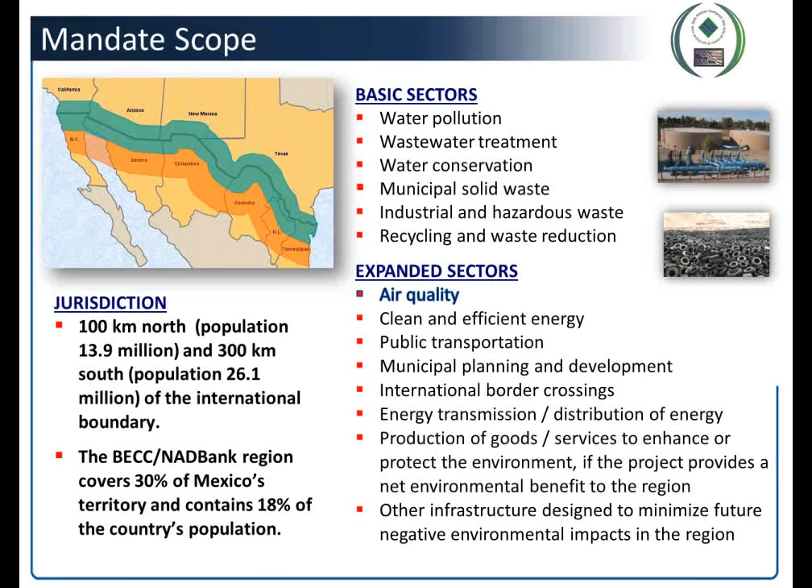So at this point, I'm going to pass the speaking to J.T. O'Brien. J.T. O'Brien is one of our project managers here at the BECC who has extensive experience in working with rural communities, and in fact, many of the projects he's working on are with rural communities. He was able to identify this need based on communications he had received not only from the communities but also from congressional offices. So J.T., if you would like to take the lead from here, I would greatly appreciate it.

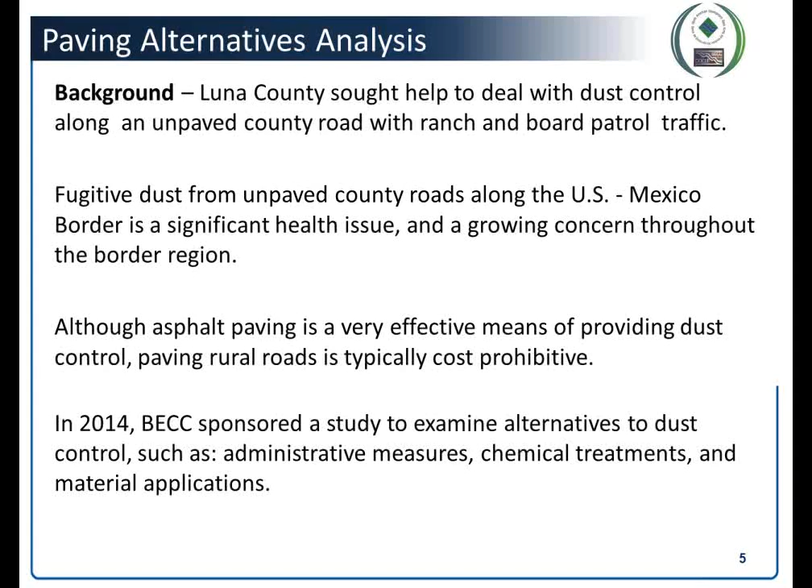But one of our biggest issues was that even though asphalt paving is a very effective means of dust control, it's just too expensive. For example, in Luna County, the road we're looking at is 20 miles long, and it's not a heavily used road. It's primarily a ranch road with a lot of Border Patrol traffic. So we knew that we needed to come up with alternatives that would be more cost-effective. So those were the primary motivations for this. Could you go to the next one?

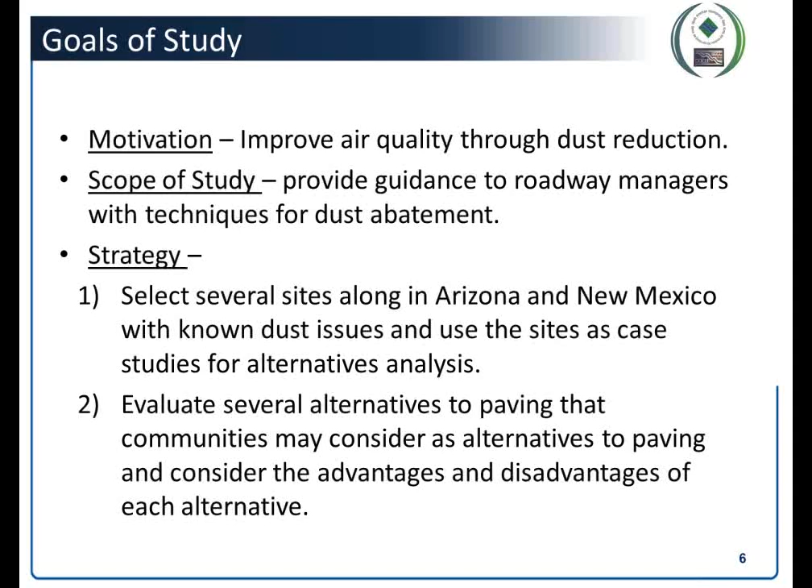Of course, the motivation then was to improve air quality. That fits within one of our sectors. And the scope then was to provide guidance for roadway managers in the border counties for looking at different techniques and strategies for dust abatement. As part of that strategy, our scope looked at several sites in the region. The sites were selected because they had different types of issues. For example, cattle on the rural roads, heavy equipment on a military base, residential type traffic. They were selected to provide a variety of situations that roadway managers might encounter.

After we scoped it, Kimley Horn was selected as the consulting engineer to perform the analysis, and then they helped further hash out some of our scope. Kimley Horn is a national organization with 70 offices. They provide a lot of services in a variety of disciplines. Today's speakers are Scott Altair and Alan Hathcock.

Scott Altair was very instrumental in helping us select sites because he's worked on the border for the past 17 years, so he knows the border region really well and has a lot of experience in particularly this issue of dirt roads and dust control. And then Alan Hathcock was the project manager, and he has a lot of expertise in roadways as well, and really did the nuts and bolts work on this study. So at this point, I guess I can pass the speaking over to them.

Thank you, JT. While we get our presentation up, are you seeing the introduction screen? Yes, we are. Okay, great. We can see your presentation now. Okay. Okay. So thank you, JT.

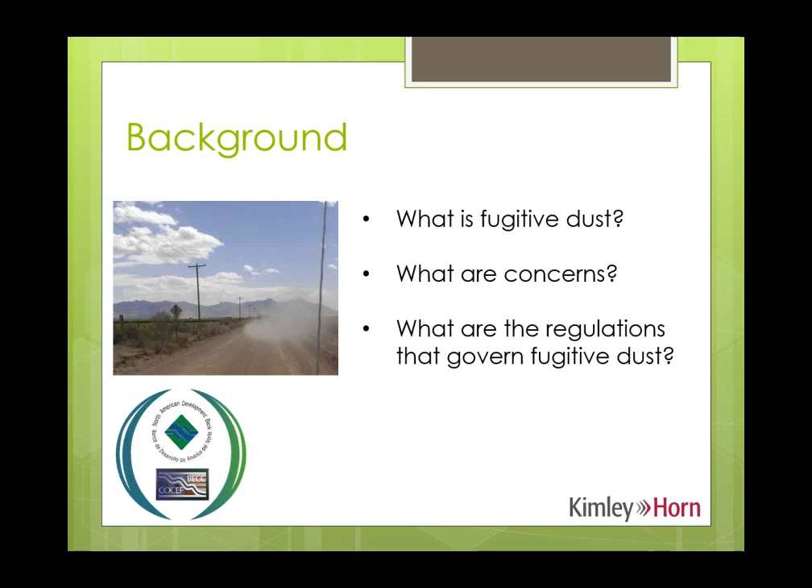Then we moved into the research and assessment component. The research and assessment was where we identified available abatement methods, documented the benefits, limitations, cost, and lifespan of the options to treat dust. And then finally, we moved into the results stage where we determined the cost to apply a particular dust abatement method, how many applications are required, is it effective, and if it is effective, how cost effective is it? And then we concluded it with a recommendation for each of the sites. So that's a little bit about what the study is going to show you and document.

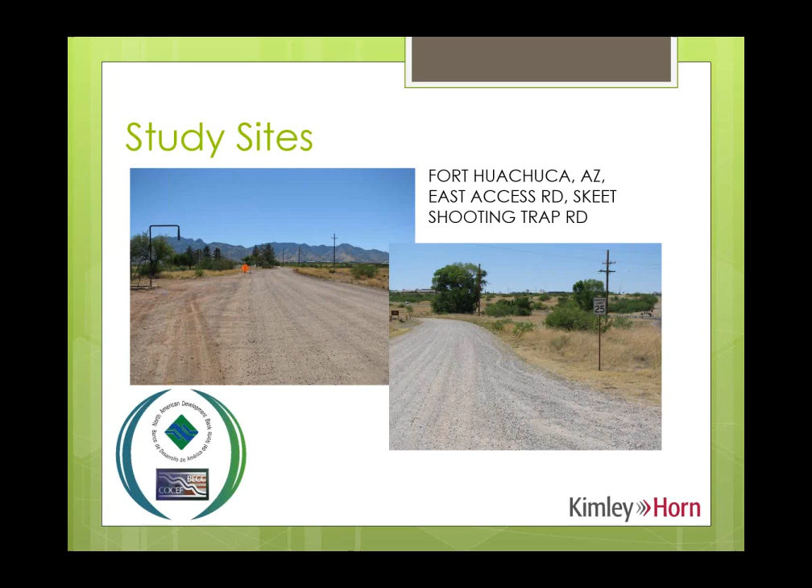The fourth study site is on Fort Huachuca, Arizona. There were several roads that combined to make up a 2-mile study segment. Unique characteristics here is this is a restricted installation. There's no public traffic. It's mainly construction traffic. While it's low traffic, it's usually heavy equipment. And they have an established watering policy in effect for all contracting work. So this particular site is unique also in that they don't have their own road maintenance. It's all contractor-owned, contractor-operated, and again, they do have an established construction watering program in effect.

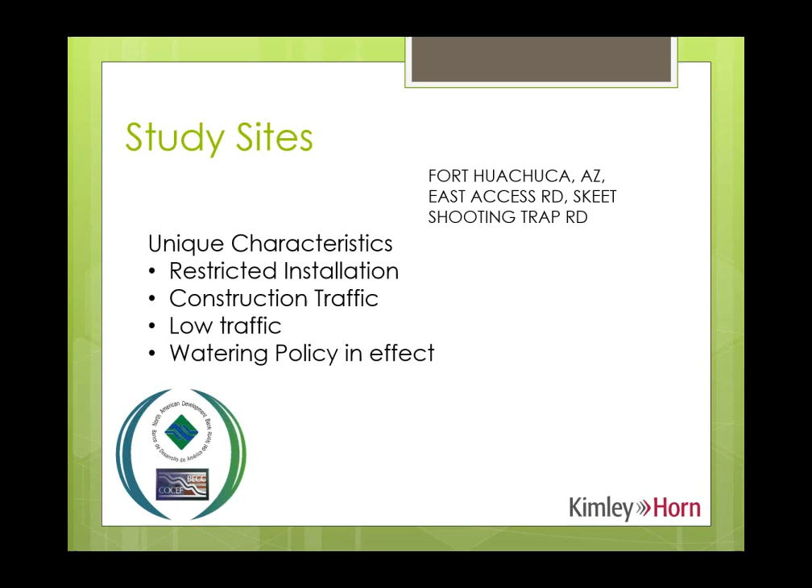And it is the closest site to a major urban area, which is something that we take into account when we get into the costing and analysis phase, because obviously being closer to an urban area, the cost of things are probably going to be more cost effective. Also, any kind of maintenance done on this particular site is contractor-owned, contractor-operated. They do not have their own staff.

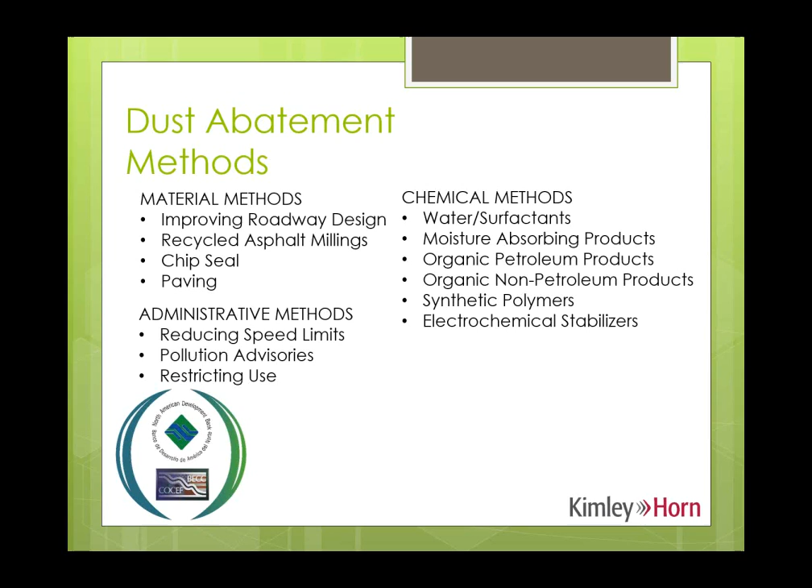Now, we're not listing any proprietary products. There are a lot of proprietary products out there, so these are all non-proprietary names. When you go and look for these products on the market, they all have very clever names that are catchy. So you won't hear us use any of those names today. So I want to go through each of the categories. This would be the material category, and just show you an example.

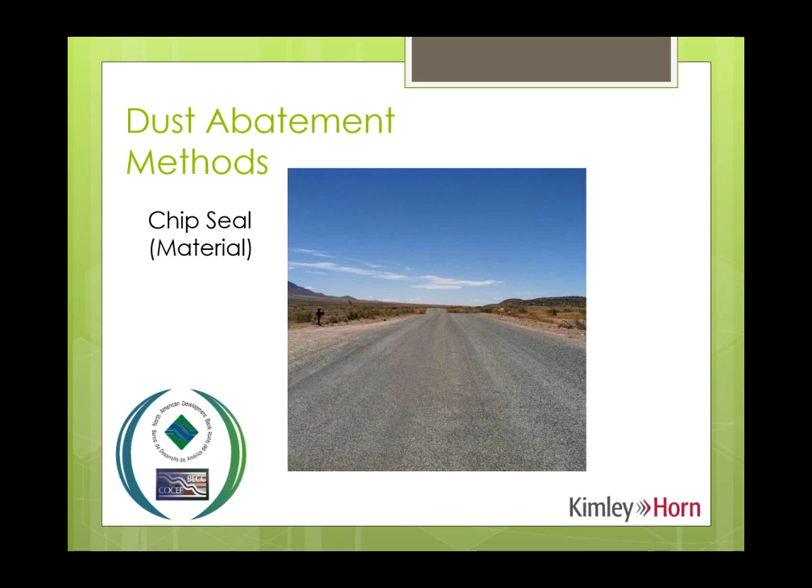Now, in the administrative category, reducing speed limits, here's an example on Fort Huachuca where they've employed a 25-mile-per-hour speed limit. Not all public agencies have the flexibility to do this, as state law generally governs the application, posting, and enforcing of speed limits. Sometimes if you can't alter the speed limit, advisory speeds or advisory placards on advanced warning signs may be allowed.

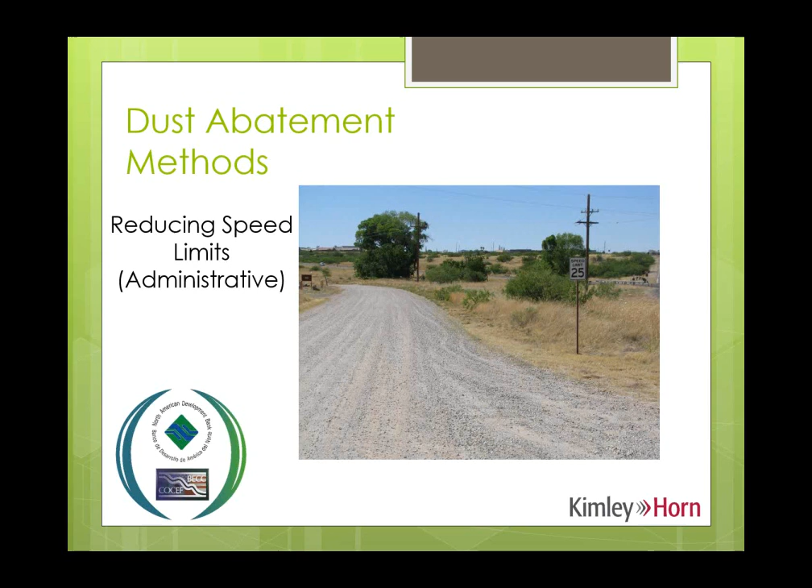In Arizona, state statutes allow the local authorities to reduce the speeds to 15 miles per hour for air quality reasons. But in the border regions, you'd have to check each of your local statutes to see if that's allowed. In the chemical category, we're showing here a synthetic polymer. This one that's being applied here is a proprietary synthetic polymer, and it's applied to a desert road. This falls into the chemical groups because it's altering the chemistry of the soil.

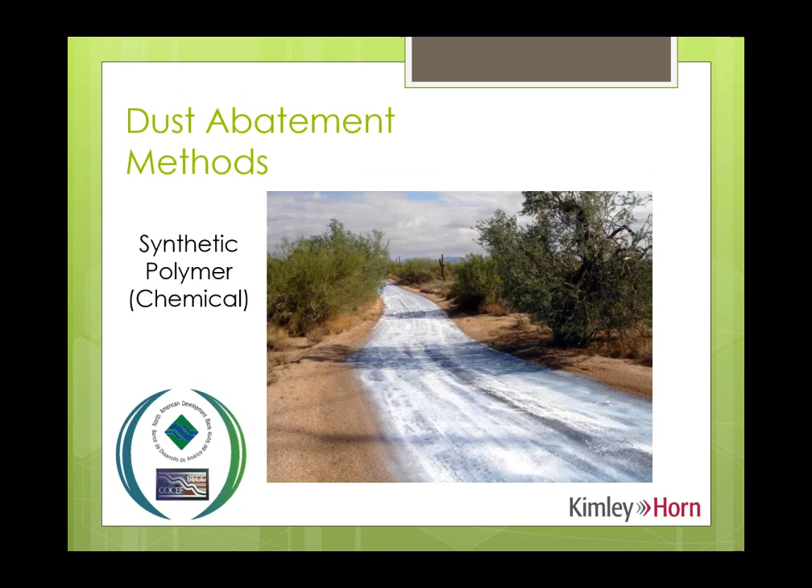So these are the three categories that we looked at. And before I hand things over to Alan, this slide you're looking at right here is from section 3.5 of the study. It's a matrix, and we list each of the dust abatement treatment options. And this is just one page of it. And what you're looking at here is synthetic polymer products and clay additives.

And we categorize these by listing the benefits, limitations, initial application cost. So we want to differentiate between the initial application cost and then the continuing maintenance cost. They're two separate items. We also list what the effective lifespan is and then how available these products are in each of the areas.

Now, just for example, clay additives. Well, any road manager may know too much clay is not a good thing for your roadway. So used in the wrong proportions, this can cause rutting and deformation of the road. Bentonite has been very successful on limestone roads, limestone treated roads. So you'd need to make sure, and that's the purpose of this matrix, is for you to go in and make sure that this is the appropriate method before you go and try it. Because if you have the wrong soil chemistry, you may not want to use this.

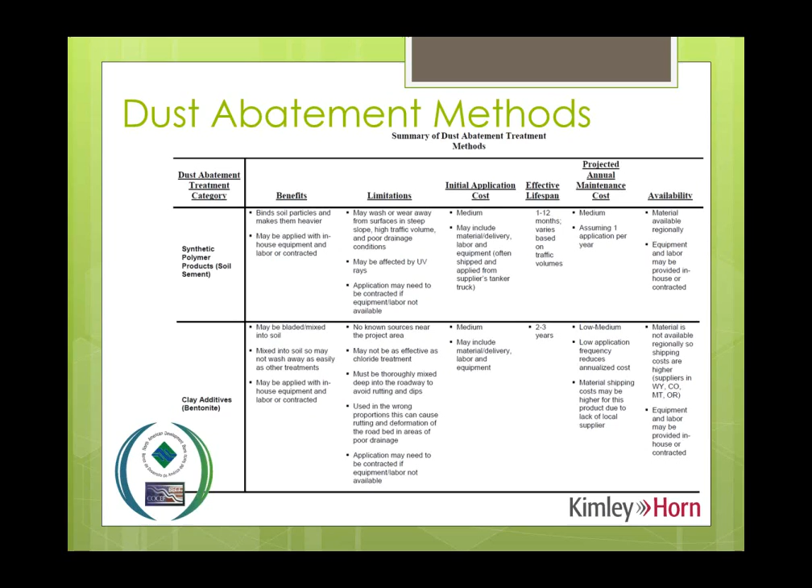So now I'm going to hand the presentation over to Alan Hathcock, and he's going to discuss the analysis and recommendations going forward. All right. Thank you, Scott. Our analysis included the costing of these items and then also projecting that over time and trying to come up with a way to see which is the most cost-effective thing to apply to reduce dust on the different roads throughout the border region.

This first slide here I wanted to share. These are the 9 different applications that we included in our cost analysis. So the first one is watering. The next 5 are within that chemical category, and the last 3 are within the material category. And all of the following charts will be in the same order, so as we look at them, you'll be able to kind of sort through that. Now, again, Scott mentioned there could be many manufacturers that do calcium chloride or the other things. We're just comparing the different costs between the different methods, not between manufacturers.

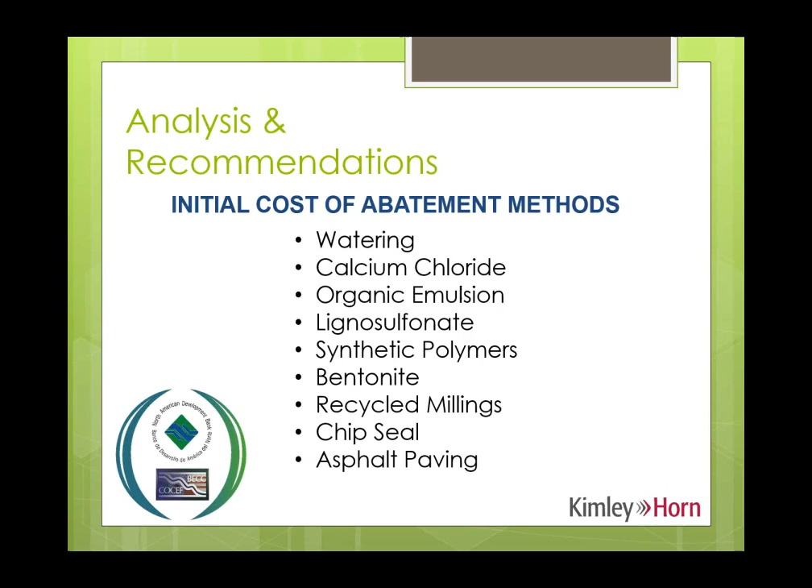On this next slide, you'll see that we have a general pricing and then the last 3 bullets. I want to specify the general pricing would be the cost to lay a product or an application along 2 miles of road, 24 feet wide. But it would be pricing that anybody would have to pay, no matter where you are along the border region.

The last 3 bullets are more like pricing factors, things that would impact that starting cost and make it either more or less. So those three factors would be proximity to the manufacturer of the product, so shipping costs. Could also be proximity to your nearest water source to be able to apply the product. Other things are if you have in-house labor and equipment versus hiring out to a contractor.

And then another factor that changes cost between the five different sites would be the traffic volume and how often you have to apply the dust abatement methods. So the higher the traffic greatly impacts how often you have to place the material or the method.

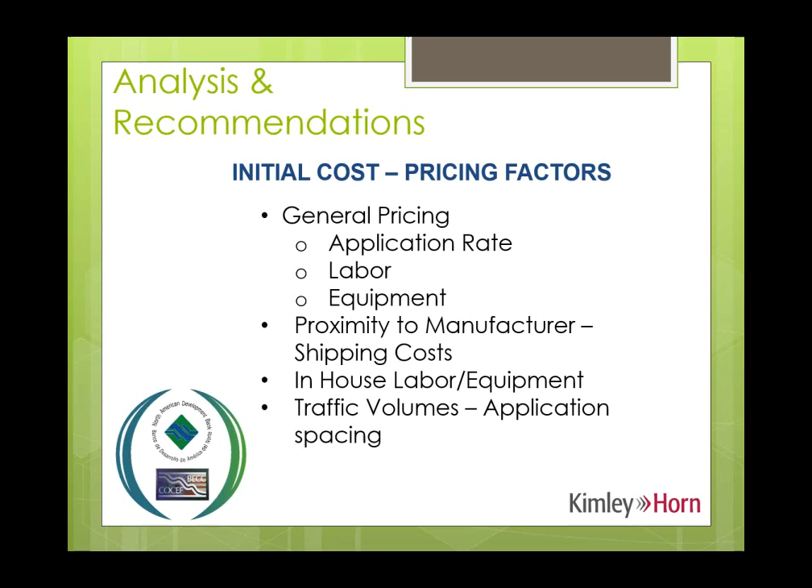So here's an initial cost example, and we wanted to include these so they're a tool for anybody to go in and go through the same process that we did. The information for all 9 types, for all 5 sites, is included in Appendix L of the study. Up in the top right corner in the box there, you'll see that we have our assumed costs for labor and for equipment.

And then over to the left top, you'll see that we're analyzing calcium chloride, and we show the rate, the length, the width, the area, the application rate of this, and come up with a cost just for the product. Then the application labor cost, we assume some time frames of how long it would take to do the work, and then equipment. So in the middle of the screen, you'll see general pricing, $23,760. So that's the base cost to lay down calcium chloride.

Then you'll see right below that, due to different traffic volumes, each location has a different lifespan. And over to the right, Scott mentioned earlier, Santa Cruz County has a higher traffic than the other 4 sites, but they all are different. They vary. So Santa Cruz County, we estimated that it would probably be 1 month before you'd have to reapply calcium chloride. And Hidalgo County is 6 months, Luna County 3, and then Fort Huachuca and U of A, because they have the least traffic, every 12 months.

That factor goes down to the bottom chart where we want to come up with an annual cost. And so that annual cost is in blue there, and it starts to show how, because of the traffic, the drainage, the uses of the road, the protection, and the climate, those all impact the actual cost of the abatement methods, and in this case, calcium chloride.

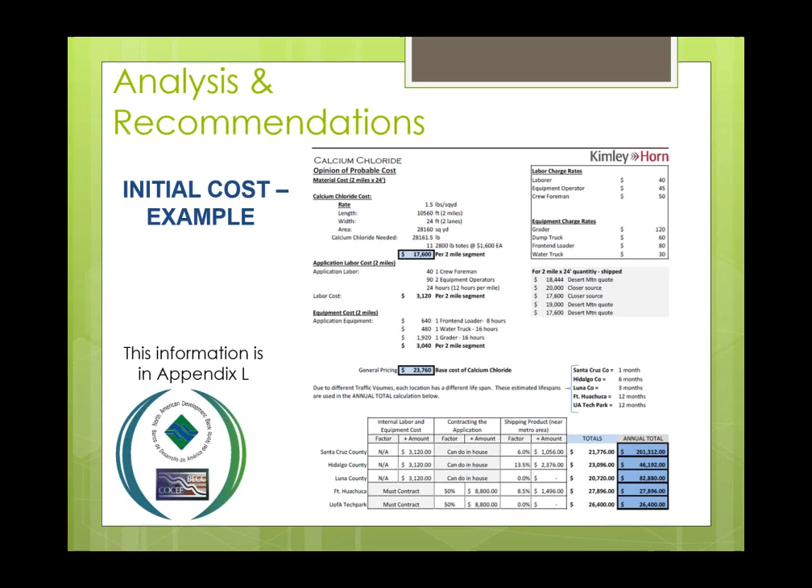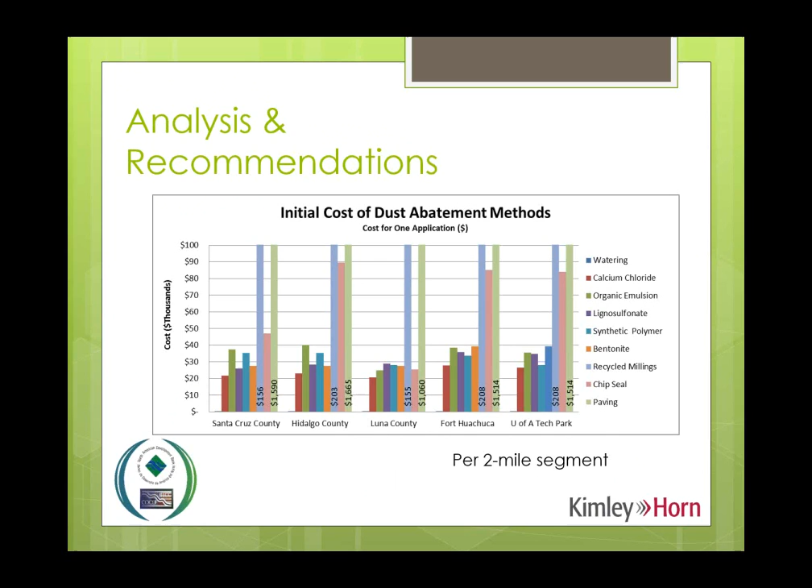So you can see that watering, you can hardly even see it. In the very beginning of each of those, it's just probably $1,000. But the initial cost isn't what's so important until we start to apply the amount of time laid down. So here's a short list of why they need to be done more often for the different types of applications. Watering every 1 to 2 days, calcium chloride, so all of the chemical treatments, there's a wide range for those depending on the use of your roadway.

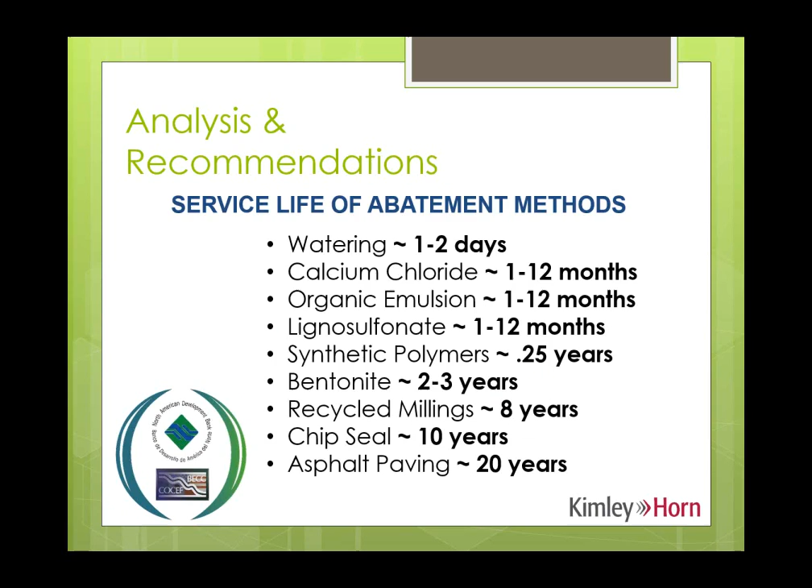And then recycled millings can last up to 8 years, chip seal can last up to 10 years, and asphalt paving up to 20 years. When we take this factor of how long things last and then the cost to place them, we come up with this next chart, the annualized cost of dust abatement methods, and it says the yearly treatment divided by the service life. So now we see paving is moving down. It's equalizing the cost of these items if it's on a yearly basis.

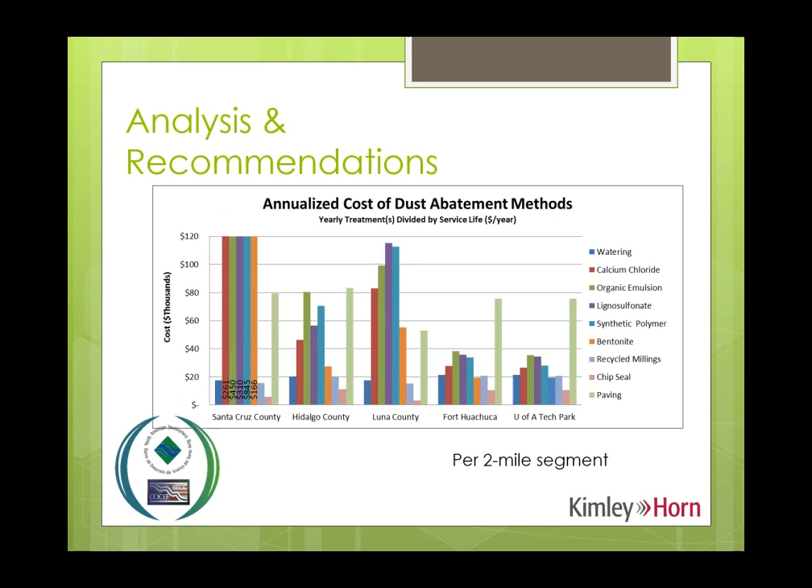But just laying the product on the ground and figuring out how long it will last still doesn't say how effective that product is. Anybody would say pavement is probably going to block more dust than a chemical treatment. And so what we had to do was analyze the effectiveness of those abatement methods. And using ADOT and FHWA methodology, we were able to use the categories that they prescribe for water trucks, chemical and polymer treatments, and hard surface treatments.

So just like the itemized cost estimate at each site, we also have an itemized PM10 calculation for each site. And so what it does is it calculates the amount of traffic, or we input the amount of traffic and then the length of the road, and then using the rates and things from their calculator, you can come up with the amount of the kilograms of dust in the air.

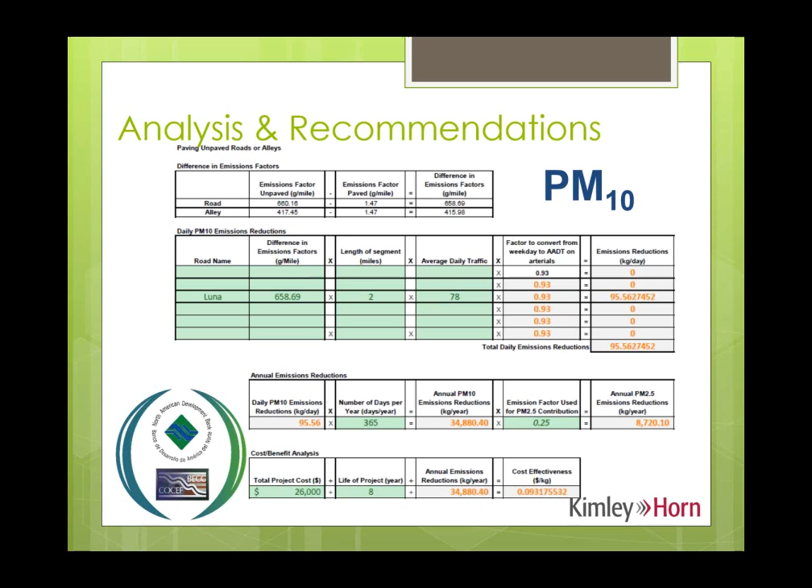So following that same methodology, here's the chart showing the PM reductions. So you see how Santa Cruz County, when they apply a pavement, they have the opportunity to reduce more particulate matter from the air. Whereas the other installations have less traffic, and so if they put pavement down, they're still only going to be able to reduce a certain amount of dust from the air.

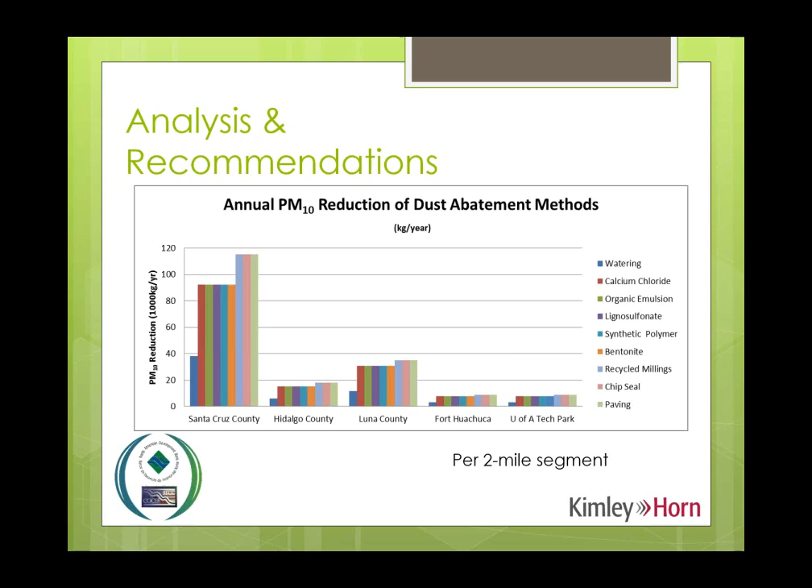And now we put all three together, which is really the point of all this. The cost effectiveness of dust abatement methods. So we're taking the annualized cost for a 2-mile segment, and we're dividing it by the amount of dust removed from the air. So it's basically dollars per kilogram. So if you spend a certain amount of dollars per kilogram, that's for your dust abatement method.

Now from this chart, we can see over to the right that chip seal and paving, like for Santa Cruz County, for instance, paving looks like a very good option. The shorter the bar, the less money you're paying per dust removed from the air. But it's also very expensive up front. The initial cost is very high.

But you can also see how the chart varies depending on those in-house operations, maintenance crews, climate, all those things have made it to where each of the 5 sites actually have a different pattern. It's not like chemical treatments are always more expensive than some other treatments. Again, the key about this chart, though, is that it's annualized cost. So, for instance, for pavement, we divided by 20-year life. And water, we multiplied by the times you'd have to do it for a full entire year.

I'd like to turn the time over to Scott, and he'll go through our final recommendations. Thanks, Alan. So what you're looking at here is our results matrix, which for each site, we wanted to make 2 recommended treatments based on the interpretation of the results. And you can see in the second column, we have recommended dust treatment number 1, and you'll see that chip seal is recommended as the preferred dust treatment for both Santa Cruz County and Luna County, and calcium chloride is the recommended treatment for the other 3.

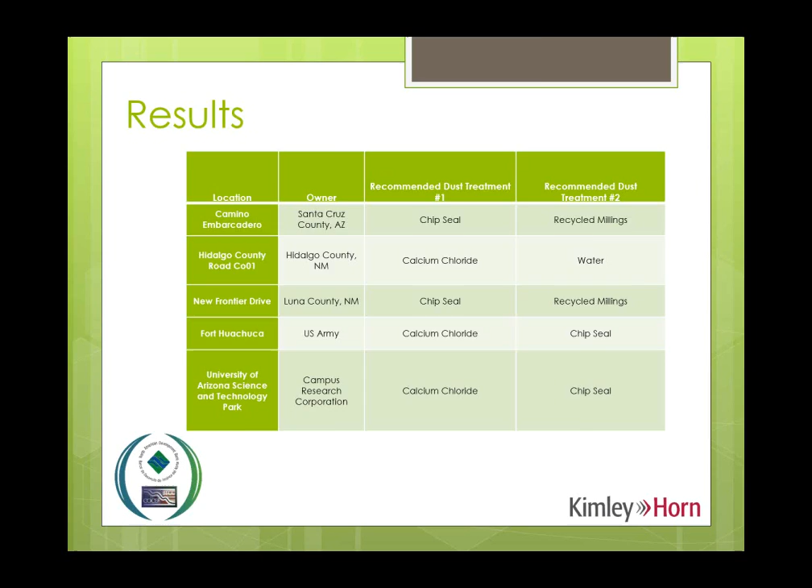Now, going back to this chart here, you may ask the question, well, why is chip seal, which appears to be the most cost-effective treatment, not recommended for all 5 sites? Well, that's a very good question, and it all relates back to the initial cost or initial investment. So what I'd like to do is take a segue here and make an analogy of the chip seal treatment or paving treatment to a purchase of a hybrid vehicle.

So if somebody was going out to buy a hybrid vehicle, we know that the gas mileage efficiency is significantly better in a hybrid vehicle, but the purchase price of a hybrid is more expensive up front. So it's going to require a higher initial investment. Not everyone probably has the budget to buy a hybrid. You probably shouldn't buy a hybrid unless you drive a lot. So if you don't drive that much, you're not going to reap the benefits of the gas efficiency. So we apply that same analogy to the selection of these products here.

Chip seal is very cost effective in what we've determined here. It basically gets the same amount of PM reduction as asphalt paving, but it's more cost effective. But it has a high initial cost. Santa Cruz County and Luna County happen to have the crews and the equipment to lay that down.

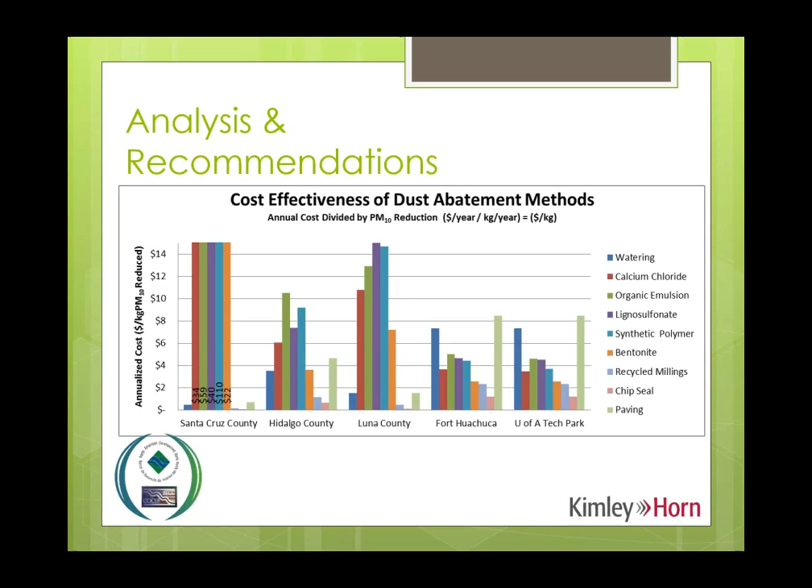So in conclusion, we've made recommendations based on trying to understand each of the site owners' capabilities and resources. We made it clear that the most cost-effective is not always the most practical and doesn't always consider the availability of startup funds.

It's hopeful that other entities can use this study as a starting point and find comparable study sites. And this study obviously may not cover every potential method, but we hope that there will be one that works for each of the road managers that are going to use this study. We hope this is used as a guideline and not a mandate for one treatment over the other.

And we also hope that we provided a supporting document that each of you road managers feels you can take to your governing bodies to help justify the right applications, and maybe even help justify a line item in next year's fiscal budget for getting some dust abatement budgeted.

So that concludes our results, but how do we use the results and information? Not every site and situation is covered, but this document attempted to acknowledge the variables that affect selection of one dust abatement product over the other. And some of these variables are listed here.